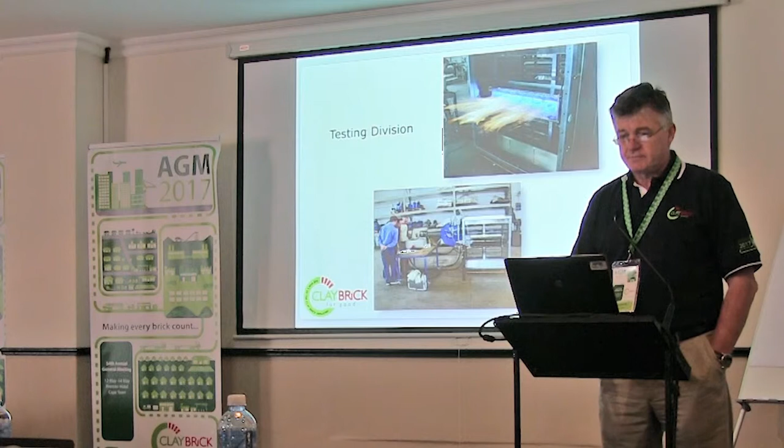Company structure: the company is a modern and high technological structure, composed of all the divisions, from the mechanical division, electrical and electronical division, testing division - every machine is tested, obviously, and we take care of packaging and transportation of the machines all over the world. Commissioning division - our technicians support our customers everywhere to commission the machines. The machines have European standards, so certification and rigorous tests for every machine that goes out of the factory.

What kind of combustible do we work with? We have a wide range of combustibles that we work with, that goes from natural gas, LPG, heavy oil, diesel, and solid fuel. By solid fuel, we mean coal, petcoke, and a lot of biomass. We also produce hot air generators for the dryers that can work also with solid fuel, light oil, heavy oil, and gas.

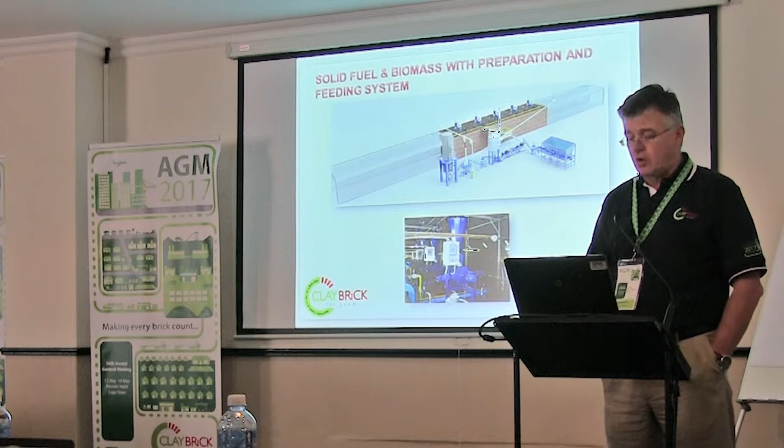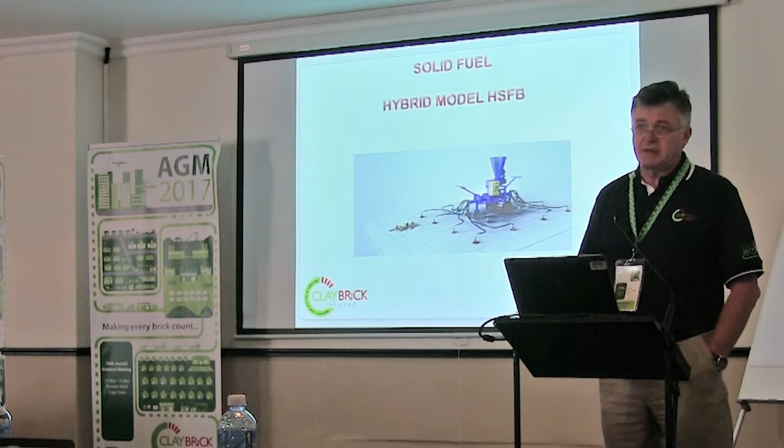Some examples of solid fuel: this is an automatic feeding system for a solid fuel like coal that can be used for a tunnel kiln, Hoffmann kiln, and everything is completely automatic and controlled. In this situation, we also provide burners that have dual function - they work with coal and biomass, for example, like sawdust. Depending on the granulometry characteristic of the coal, we have the proper machines.

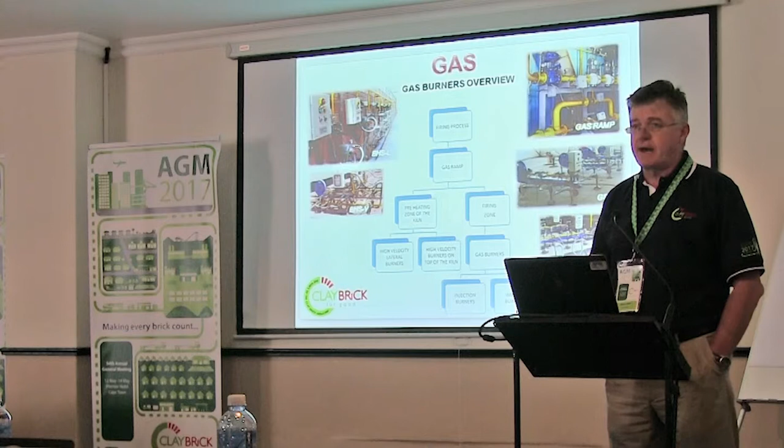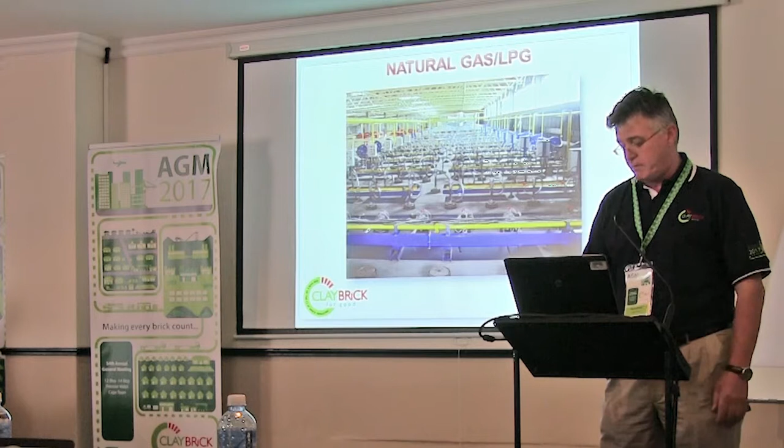For gas, we provide all the elements for the gas station, starting from the gas ramp, the pressure regulators, and all the security items to control the process of the gas. This is an example of a gas firing system for a tunnel kiln that can range from a very small tunnel kiln up to a very big tunnel kiln, and also for a Hoffmann kiln.

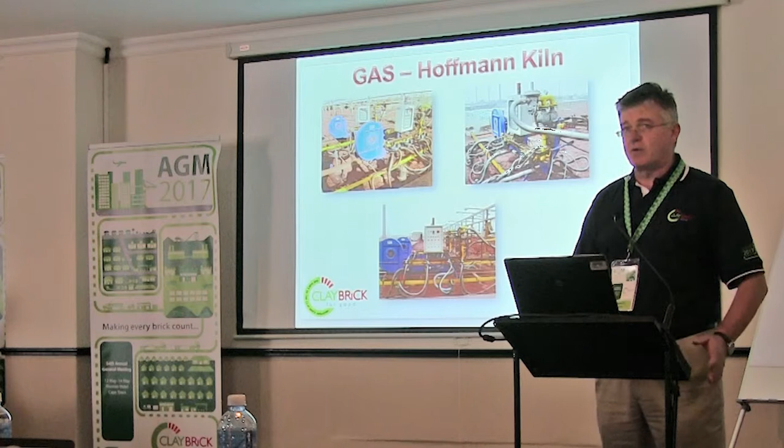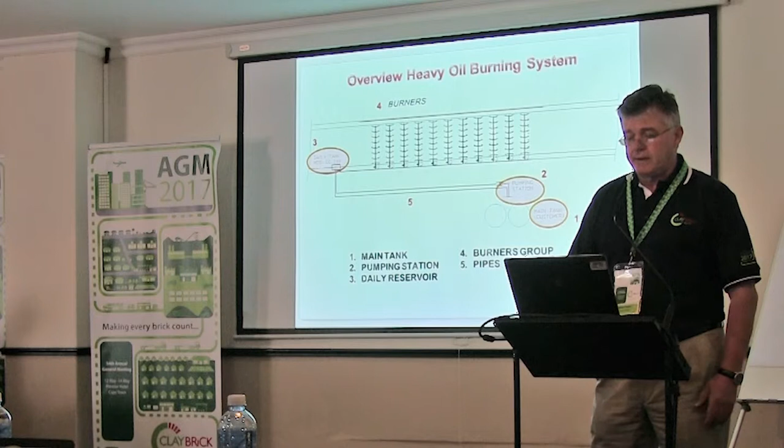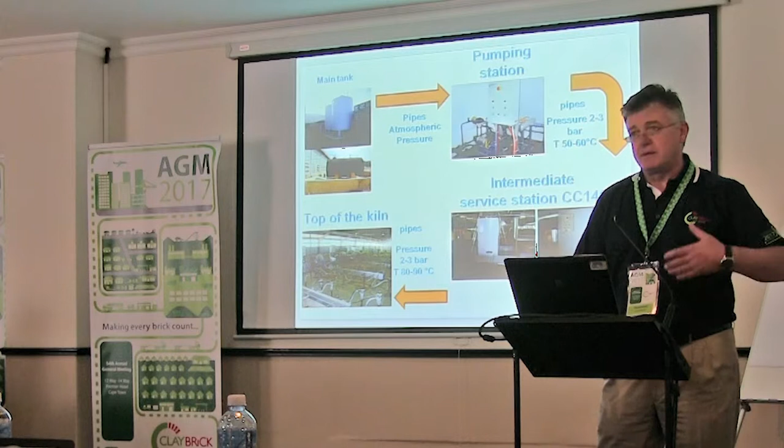We also provide all the facilities for the pressure regulators, meters and pipes as well. For heavy oil, the typical configuration is given by a big tank and burners, as you can see in this picture. So from the main tank we go with a pumping station on top of the kiln. At the top of the kiln there is a filtering station, heaters with resistances, and all the burners. We also provide pipes, but everything works automatically.

So in this situation, we have our own instrument that we developed together with the University of Bologna, and our technicians can provide this service.

So here in South Africa, mainly what we know, we see Hoffmann kiln, tunnel kiln, and unfortunately a lot of clamp kilns, because for clamp kilns we cannot help too much, since they don't use burners. So we focus more on the tunnel kiln and Hoffmann kiln.

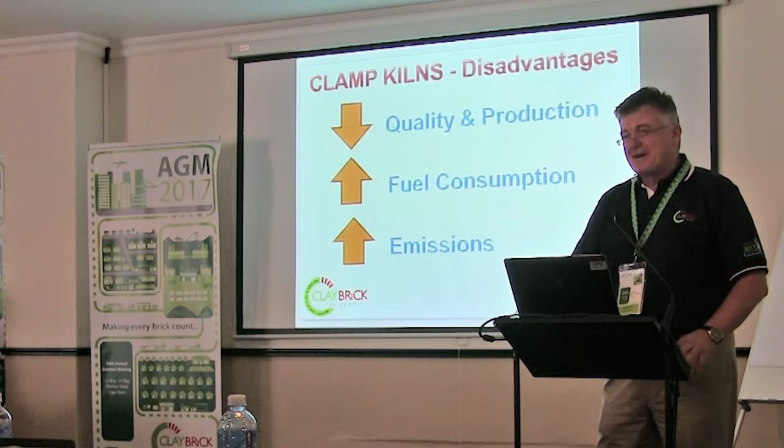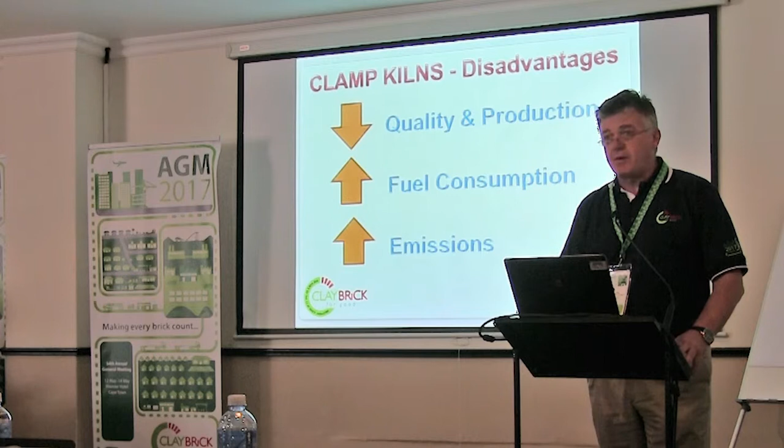The clamp kilns, as everybody knows, have some good points and bad points. We try to focus on the bad points: the quality, production, the fuel consumption, the labor cost, the emission also is something that can be a problem. And also it's very important to use the proper shoes when you are working on top of the kiln, because it can be very hot.

Personal experience. For the Hoffman and tunnel kilns, we care about the good points. We see the quality, production, the reduction of fuel consumption, and we take care a lot about the emission. Of course, it's a very important matter, not only in South Africa but all over the world. So to consider a good firing system, it's reasonable to expect a good reduction in consumption, and also increasing the production. Obviously, it's not only a matter of the firing system, but also how the kiln can be managed, and for this reason our technicians can also support with this kind of technical information.

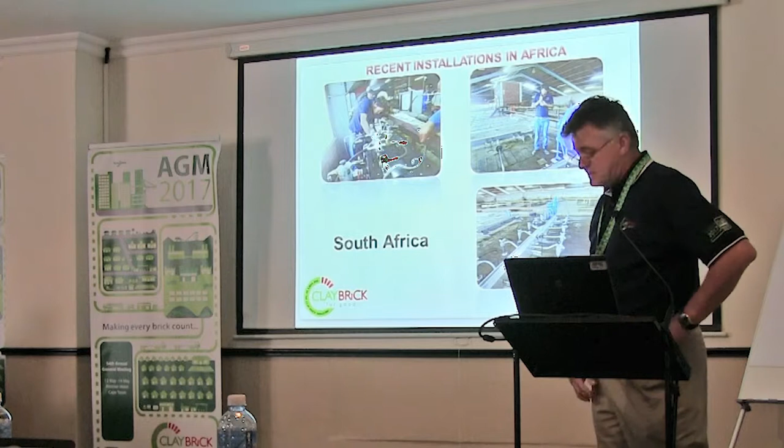Still also in South Africa, I think Nico can recognize this kiln. We also have our machines running. Another factory we recently worked with here in South Africa, in the Cape Town area.

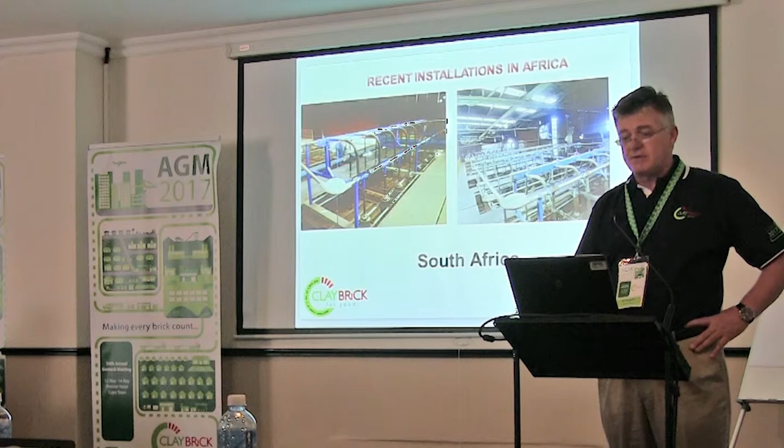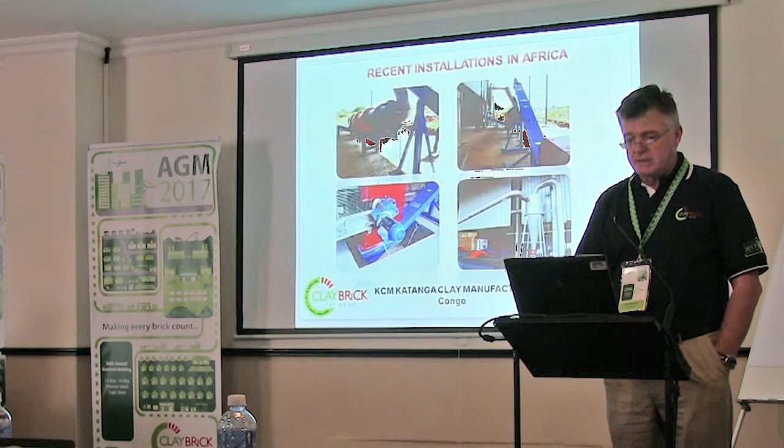So just to finish my presentation: making every brick count with Bernini's firing system. I think we'll try to help you in the future. Thank you for your attention, and that's it.